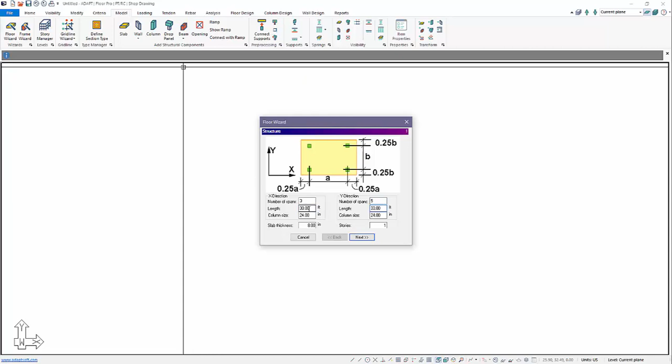I'm going to create a model just using the Floor Wizard, and we'll do a 3-span by 4-span. Let's do 5 spans to give the tendons a bit of length here. So we'll do a 30-foot span, and here we'll do a 33-foot span. And we create our tendons like so.

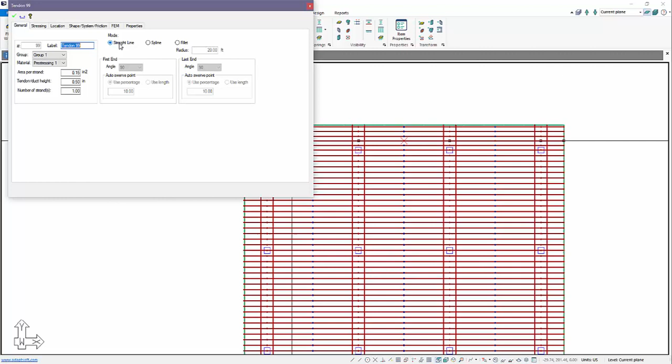Now, by default, when you model tendons, if I open up the tendon properties, we can see the tendon is defaulted to a straight line, just a linearized tendon. We also have had spline in there now for a couple of versions, and we've created this new option called fillet. Let's go ahead and delete just a few tendons here, just for the sake of this example, and I'm going to show you the difference. So this is linearized. It's just straight line segments representing the tendon.

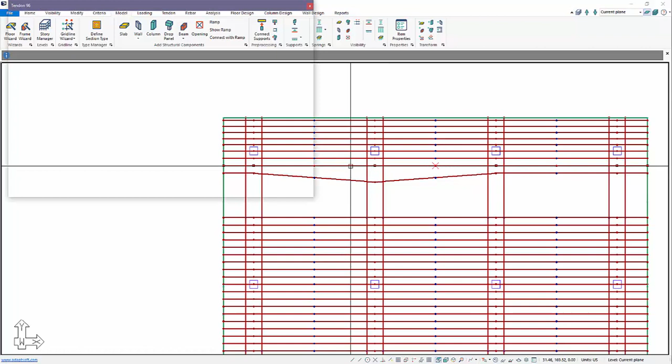If I change this tendon, for example, to spline, then we have additional options which have been there for spline, and we'll go ahead and move that out like so. Let's move it a bit further. So now we have more of a curved tendon using the spline function. So these are pretty similar. We also have this option for the linear fillet, or fillet radius is, I believe, what it's called.

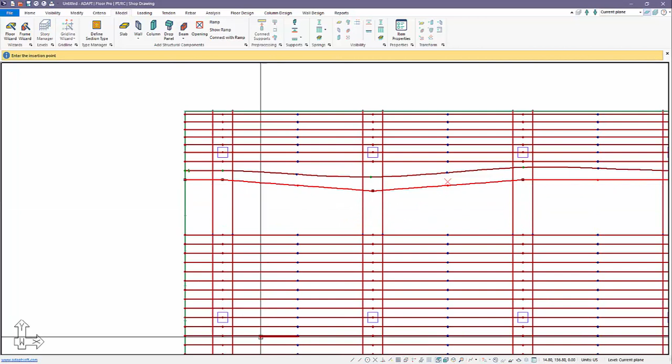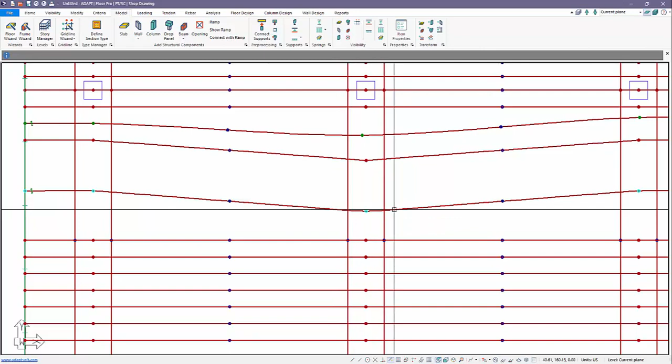I'll copy this tendon down to there, and now we're going to create this radius fillet. If I change the radius here, maybe to 30 feet, and update that, you can see that we have straight line segments where we have a change in the direction of each segment. Then we create some virtualized radius that allows us to create curvature on that point relative to the adjacent segments. So this is a new way to represent tendons, which may be more in line with how they're represented through shop drawing production. We're going to save this model.

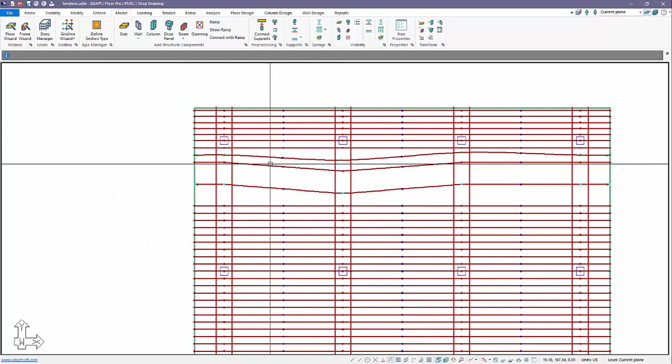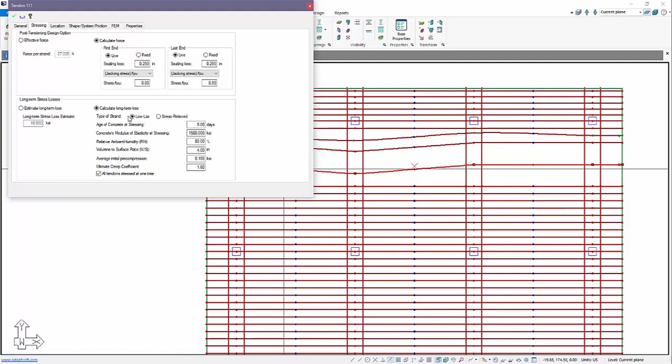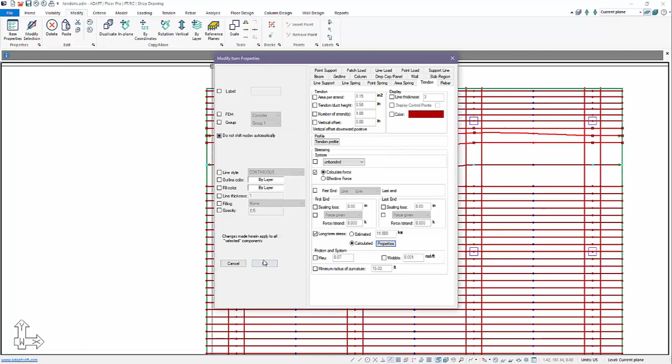In this case, we'll go ahead and make that change for that tendon, and for a few other tendons. I'll modify the selected tendons. If we go here to calculated option, we can go to long-term stress, calculated, and edit the properties here. Okay, and if we come back over to tendon, I'm going to change this, and I'll select those tendons and run the friction and loss calculator. Had I manipulated all the tendons, I could run it for all of the tendons.